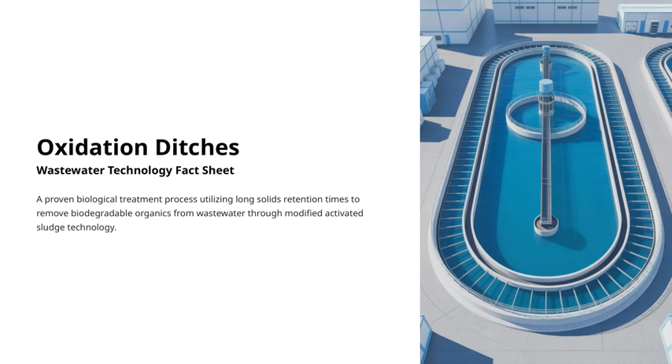This is part of the Wastewater Technology Fact Sheet series. We'll be exploring a proven biological treatment process that uses long solids retention times to effectively remove biodegradable organics from wastewater, all through modified activated sludge technology. Over the next few slides, we'll cover how this process works, its benefits, and where it's typically used.

So let's get started. An oxidation ditch is a type of biological treatment process, but it's a bit of a modified version of the activated sludge system. What makes it unique is that it uses long solids retention times, or SRTs, which helps in effectively removing biodegradable organics from wastewater. These systems are usually designed as complete mix systems, meaning the contents are well mixed, but they can also be modified to operate more like plug flow systems, which have a different flow pattern.

Typically, treatment systems like these consist of one or multiple channels arranged in a ring, oval, or horseshoe shape. Because of this shape, they're often called racetrack-type reactors. To keep the system moving and ensure proper oxygen transfer, aerators are installed either horizontally or vertically. These aerators circulate the water, introduce oxygen, and aid in aeration, which is critical for the biological processes to work effectively.

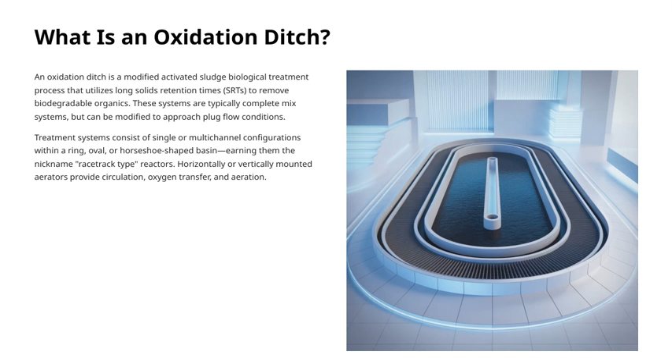Connecting all of these points, the oxidation ditch is a versatile and efficient way to treat wastewater, especially because of its ability to retain solids longer and adapt to different flow conditions, making it a valuable part of the overall wastewater treatment strategy. Let's walk through how this process works.

First, we have preliminary treatment, which involves removing large debris and grit using bar screens and grit removal devices. Sometimes, facilities also do primary settling at this stage, but that's not always the case. Next is aeration and mixing. Here, the flow enters the oxidation ditch, where it's aerated and mixed with return sludge from the secondary clarifier. Surface aerators help circulate the mixed liquor at speeds between 0.25 to 0.35 meters per second, ensuring proper mixing.

Then comes biological treatment. This is where microbial growth occurs, thanks to the oxygen entrained in the mixing process. The goal is to promote microbes that break down organic matter. The motive velocity helps ensure these microorganisms come into contact with the incoming wastewater for effective biodegradation. After that, we have clarification. The treated water is settled in a secondary clarifier, which separates the remaining solids. Depending on the water quality requirements, tertiary filters might be added for additional polishing.

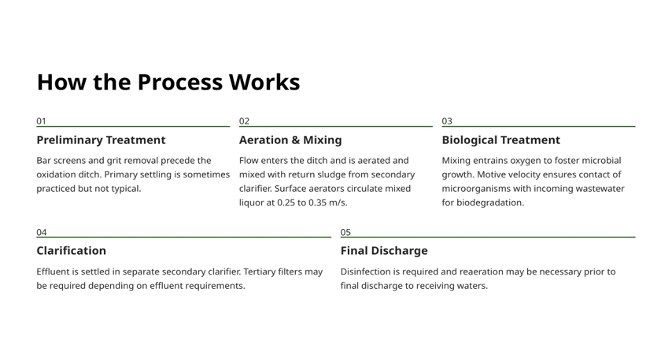Finally, the process concludes with the final discharge. Disinfection is crucial here to eliminate harmful pathogens, and sometimes reaeration is needed before releasing the water into receiving waters. This entire process ensures we treat wastewater effectively before it's safely returned to the environment.

Now, let's explore enhanced nutrient removal. Oxidation ditches can be operated to achieve partial denitrification, which helps reduce nitrogen levels effectively. One common method is the Modified Ludzack-Ettinger process, or MLE, where an anoxic tank is added upstream of the ditch. This tank, along with mixed liquor recirculation, allows for higher levels of denitrification, making the process more efficient.

Moving to the aerobic zone, autotrophic bacteria play a key role by converting ammonia nitrogen first into nitrite nitrogen and then into nitrate nitrogen. This step is vital for nitrogen removal. The recirculation process involves taking mixed liquor from the aerobic basin and sending it back to the anoxic zone. This recirculation supplies the anoxic zone with high concentrations of nitrate nitrogen, which is essential for the next stage. In the anoxic zone, heterotrophic bacteria step in to convert nitrate nitrogen into nitrogen gas, which is then released into the atmosphere. This is how we effectively remove nitrogen from the wastewater.

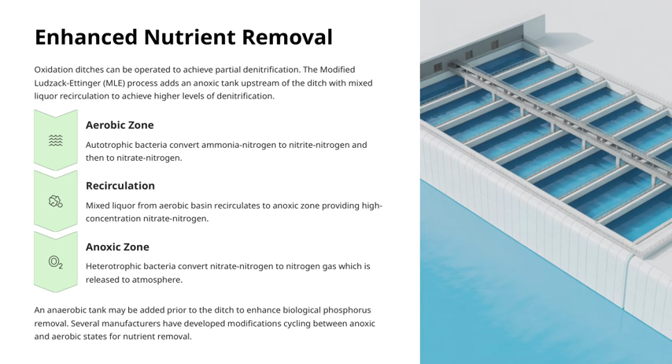Additionally, to target phosphorus removal, an anaerobic tank can be added before the ditch. Some manufacturers have developed advanced modifications that cycle between anoxic and aerobic states, further enhancing nutrient removal capabilities. All these processes work together to improve overall treatment efficiency, aligning with our goal of achieving cleaner, environmentally friendly wastewater management.

Let's take a look at where this oxidation ditch technology can be applied. As you can see, it's a fully proven secondary wastewater treatment method that works well in any situation where activated sludge treatment is suitable. This means it's quite versatile, especially effective in small installations, small communities, and even isolated institutions.

One of the key advantages is its applicability in plants that require nitrification, which is the process of converting ammonia into nitrate. The basins can be sized with the right solids retention time, or SRT, to achieve nitrification even at lower temperatures, which is crucial for maintaining consistent treatment performance.

Interestingly, this technology originated in the Netherlands, with the first full-scale plant installed in Voorschoten back in 1954. Since then, it has gained widespread acceptance. In the United States alone, there are now over 9,200 municipal oxidation ditch installations, demonstrating just how reliable and scalable this process is. And when it comes to nitrification, these systems are highly effective.

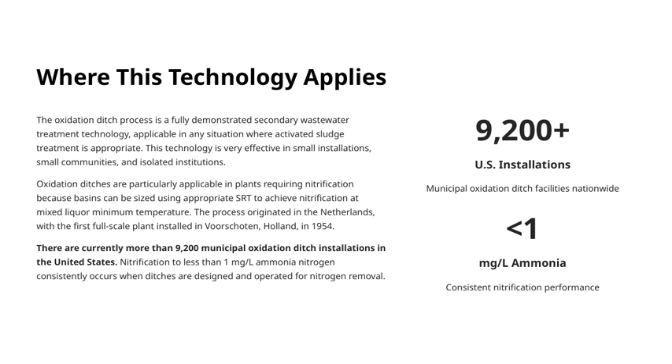They consistently achieve ammonia levels below 1 milligram per liter, which is a key indicator of successful nitrogen removal. This consistent performance is a testament to the robustness of the oxidation ditch process and its importance in modern wastewater treatment. Let's take a look at some of the advantages and disadvantages of this treatment process.

Starting with the advantages, one of the key benefits is reliability. Because the water level remains constant and there's continuous discharge, this helps lower the overflow rate at the weir and prevents periodic surges of effluent. This consistency makes the system more stable overall.

Another advantage is shock load protection. The long hydraulic retention time combined with thorough mixing means the process can handle sudden loads or hydraulic surges without being overwhelmed. This resilience is crucial for maintaining treatment performance under variable conditions.

Additionally, this process produces less sludge compared to other biological treatment methods. The extended biological activity means bacteria and microbes work more efficiently, reducing sludge accumulation. That's not only good for operational costs, but also for reducing the environmental footprint.

Energy efficiency is another major plus. Because the process requires less energy than some other biological treatments, it can lead to significant cost savings over time. Now, moving on to the disadvantages. One challenge is the quality of the effluent. The suspended solids concentrations tend to be relatively high compared to other modifications of the activated sludge process. This means additional treatment steps might be needed to meet strict discharge standards.

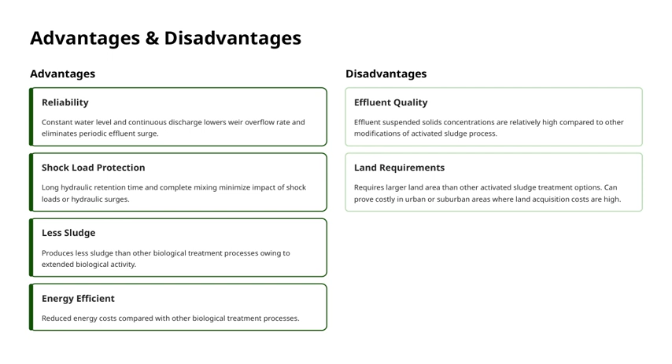So, while there are clear advantages in reliability, shock load handling, sludge production, and energy efficiency, it's important to weigh these against the higher land requirements and the effluent quality considerations. Let's take a closer look at some of the key design parameters for wastewater treatment systems.

First up is solids retention time, or SRT. The SRT values we use in design can vary quite a bit, ranging from as low as 4 days to over 48 days. Typically, for nitrification processes, we're looking at SRTs between 12 and 24 days, and this largely depends on the minimum mixed liquor temperature. Longer SRTs generally promote better biological solid stability and treatment efficiency.

Next, we have BOD loading. This refers to the amount of biochemical oxygen demand that the system needs to handle, and it can vary widely, from less than 160,000 mg per 1,000 liters up to more than 40 million mg per 1,000 liters. However, a common design rate we often use is around 240,000 mg per 1,000 liters per day. This helps ensure the system can handle the expected organic load effectively.

Moving on to hydraulic retention time, or HRT. In oxidation ditches, which are a popular treatment method, the HRT typically ranges from about 6 to 30 hours. The goal is to give the wastewater enough time for biological processes to occur without unnecessary tank volume. Speaking of oxidation ditches, they are usually built with reinforced concrete, but other materials like gunite, asphalt, butyl rubber, and clay have also been used successfully.

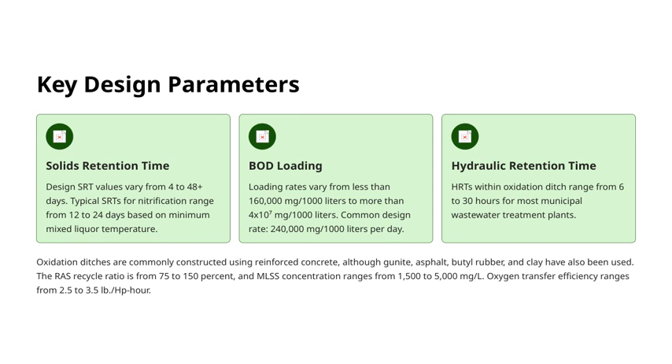Lastly, oxygen transfer efficiency in these systems typically ranges from about 2.5 to 3.5 pounds per horsepower hour, which is important for optimizing aeration performance. All these parameters are interconnected and critical for designing an effective and efficient wastewater treatment system.

Proven performance results. As fully demonstrated secondary treatment processes, oxidation ditch processes are highly adaptable for nitrification and denitrification. Performance data from 17 oxidation ditch plants, ranging from 0.1 to 12 million gallons per day, shows that these systems consistently achieve over 90% removal of BOD, suspended solids, and ammonia nitrogen. Let's take a look at some real-world examples.

The Casa Grande water reclamation facility in Arizona began operation in February 1996. It's designed to treat about 15,142 cubic meters per day, or 4 million gallons per day. Notably, it uses an anoxic zone before the aerobic zone to enhance denitrification, which is key for nitrogen removal.

Another example is the Edgartown wastewater treatment plant on Martha's Vineyard. It's designed to treat 757 cubic meters per day in winter and up to 2,839 cubic meters per day in summer. This plant features 2 Carrousel denitIR basins, which help efficiently remove nitrogen during seasonal fluctuations.

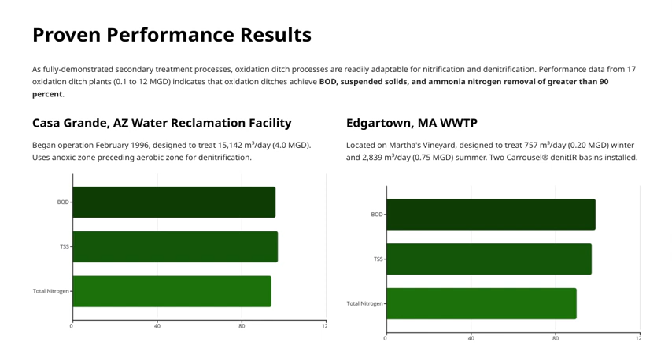These examples highlight how oxidation ditch systems deliver reliable, high-performance treatment, adaptable to different flow rates and specific treatment needs. This flexibility and proven effectiveness reinforce their role as a reliable solution in secondary treatment. Let's take a closer look at the operation, maintenance, and costs associated with oxidation ditches.

First off, they are known for their low maintenance needs. Compared to other secondary treatment processes, oxidation ditches require relatively little upkeep. In most cases, you won't need chemicals, although adding metal salts can help improve phosphorus removal if needed.

When it comes to residuals or sludge generated, we're typically looking at production levels of about 0.2 to 0.85 kilograms of TSS per kilogram of BOD applied. On average, it's around 0.65 kilograms of TSS per kilogram of BOD, which is actually less than conventional activated sludge systems because these systems operate with longer solids retention times, or SRTs.

Oxygen requirements are another important aspect. Usually, the oxygen needed ranges from about 1.1 to 1.5 kilograms of O2 per kilogram of BOD removed. For TKN oxidation, it's approximately 4.57 kilograms of O2 per kilogram of TKN. Transfer efficiency, which measures how effectively oxygen is transferred into the water, typically falls between 2.5 and 3.5 pounds per horsepower hour.

Now, looking at capital costs, for facilities treating anywhere from 3,785 to 25,740 cubic meters per day, equivalent to roughly 1 to 6.8 million gallons per day, the costs generally range from about 66 cents to $1.10 per liter per day, or $2.50 to $4 per gallon per day. A good reference point is the Blue Heron Water Reclamation Facility in Florida, which, at 4 million gallons per day, was built at around 80 cents per liter per day.

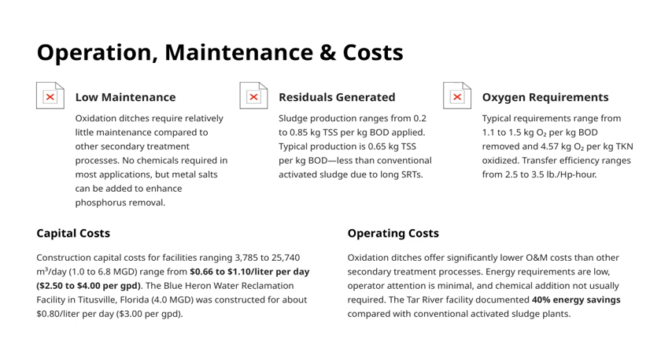Finally, on the operating costs front, oxidation ditches are quite economical. They tend to have significantly lower operation and maintenance costs compared to other secondary treatment options. Energy use is low, operator attention is minimal, and often no chemicals are needed. For example, the Tar River facility reported about 40% energy savings when compared to conventional activated sludge plants, which really highlights how efficient and cost-effective this system can be.

When considering a wastewater treatment solution, reliability and proven performance are key. Oxidation ditches have been around for a long time and are a mature technology, with over 9,200 installations across the United States. This extensive use demonstrates their dependability. They consistently achieve more than 90% removal of BOD, suspended solids, and ammonia nitrogen, which are crucial for meeting environmental standards. Plus, they offer significant operational advantages, making them a trusted choice.

Another important aspect is energy efficiency. These systems can save up to 40% of energy compared to conventional treatment methods, which not only reduces costs, but also minimizes environmental impact. They're designed to be low maintenance, requiring minimal operator attention and fewer chemicals, which simplifies operations and lowers ongoing expenses. Flexibility is also a major benefit.

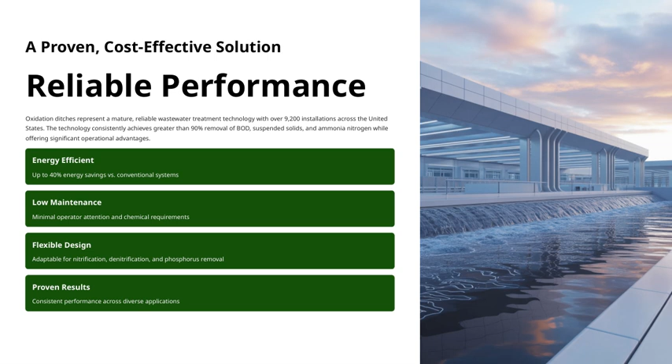Oxidation ditches can be adapted for various treatment processes like nitrification, denitrification, and phosphorus removal, allowing them to meet different treatment needs. And finally, their proven results speak for themselves: consistent performance across a wide range of applications, reinforcing their status as a reliable, cost-effective solution for wastewater treatment.